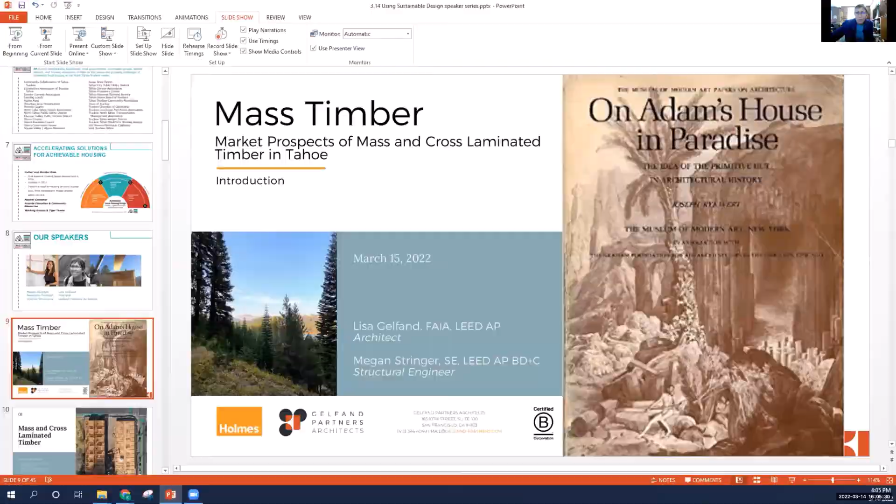Okay, I think I will just get going with the beginning part of this. This is Lisa Gelfand, and for 20 years I've had a place up in Serene Lakes. So that's my view of one of those lakes. For the whole of my career in architecture, it sort of started with this idea that the primitive hut and little houses are just the source of everything that every architect ever did. And certainly we feel like we're in paradise up there. So where it all comes together is how are we going to keep doing stuff so that we continue to feel like we're in paradise and that we haven't just destroyed the whole place.

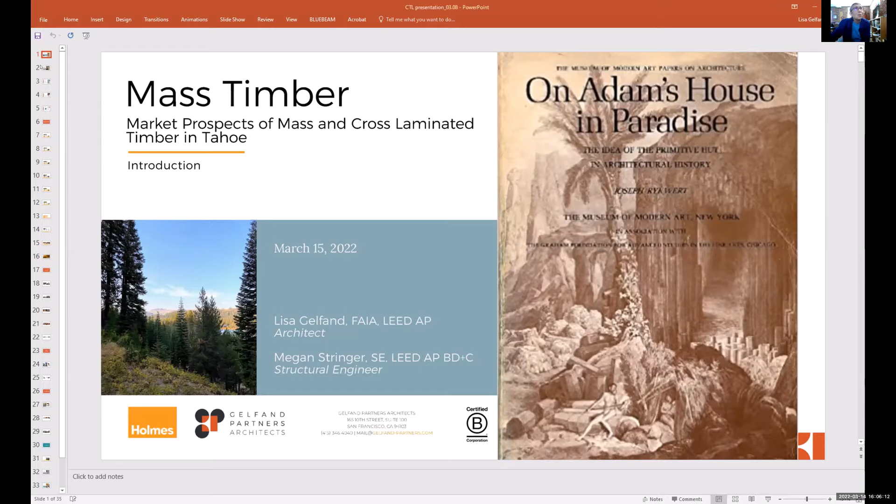And so one of the ideas is to think about how do we build with wood? Do we build with wood the way that we always did? Or is this something that we could change that would actually start to benefit both the building process, but also the forests? So I invited Megan to talk about it because she's actually been doing it. So Megan, do you want to talk a little bit about what your connection to this is?

Real quick. So yeah, Megan Stringer. I'm a structural engineer. I work down in the Bay Area in San Francisco at a company called Holmes, and we have offices up and down the West Coast. I started on my first mass timber project back in 2015. I worked on a two-story public library building out in the East Bay in Brentwood, California. Then I started working on a pretty large project. It was actually North America's largest mass timber building.

Back in 2015, and that took about 5 years to complete. So since then, I've been working on a bunch more, and our company overall is on over 50 mass timber projects, either completed, in design or in construction. So yeah, happy to share some of the things we've learned and show you all some specific applications that would be relevant to your community.

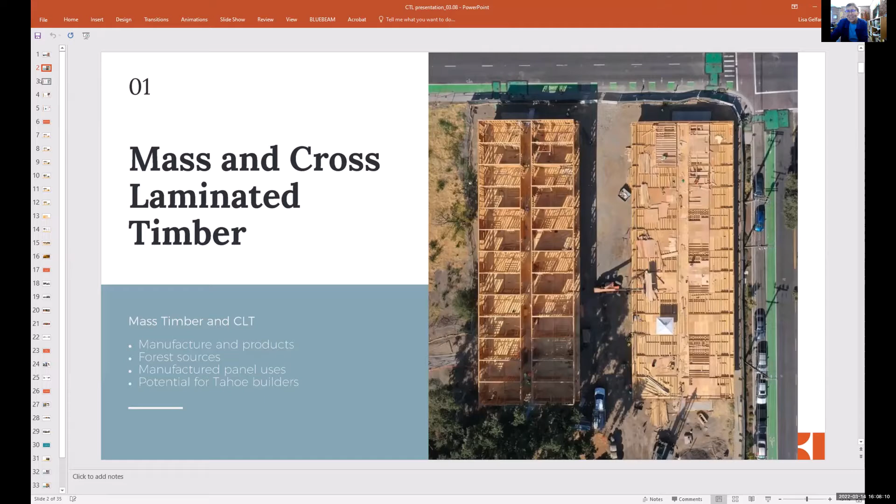there's a lot of different kinds of mass timber. CLT is maybe the one that people have heard about the most. It's basically dimensional timber laid up parallel and then perpendicular, so you've got the crossing at 90 degrees. That's what's up here in upper left. You could do it with nails. You could do it with glue. You could do tongue and groove. My cabin in Serene Lakes has got a tongue and groove roof deck. So this has been around. And DLT would just be laminated with a dowel. And mass plywood is just, if you kept laying up your plywood, perpendicular in different plies, you get another way of doing it.

One of the advantages of having mass timber is in fire. We've all had fireplaces. It's really hard. You can't just hold a match to a log and get it going. And so that's one of the really important things about this kind of wood construction as opposed to light frame, is that it really has fire resistance.

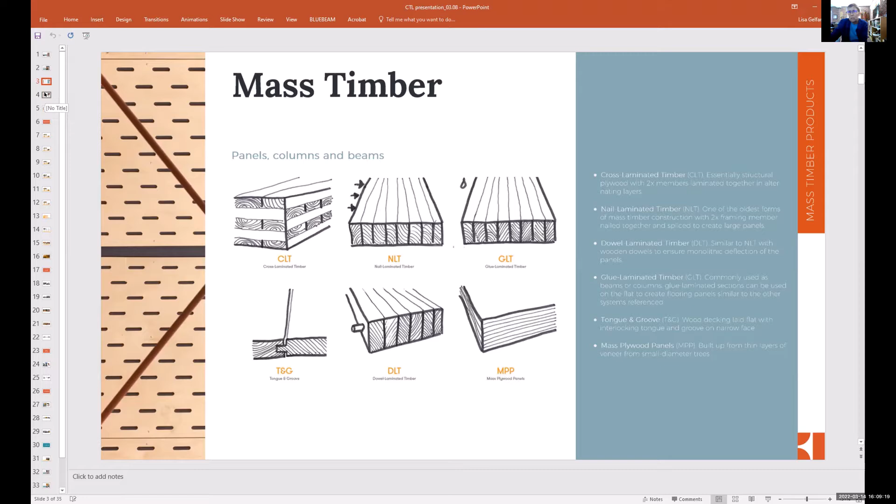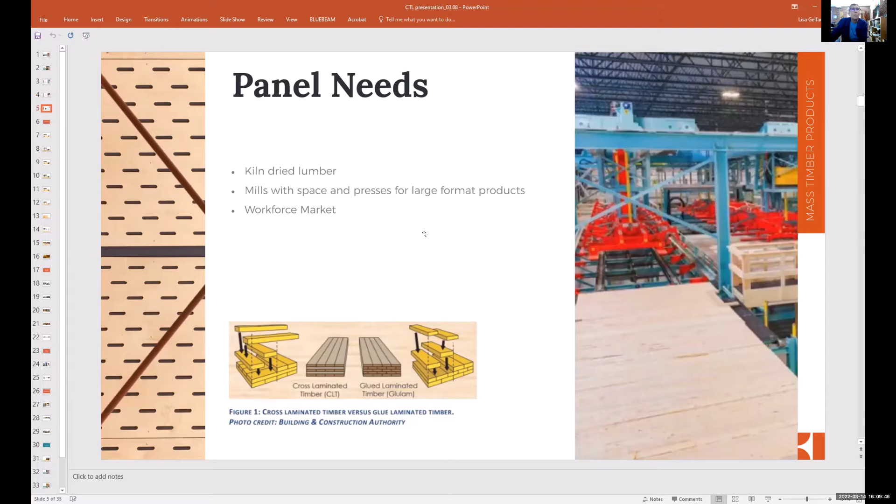So it takes really big facilities to make it. I was looking at the 100,000 square foot plant up in British Columbia. These presses are enormous, and the product that comes out of here could be 30 feet long or 40 feet long. All the different plants have different capabilities, but they all need kiln dried lumber.

And one of the advantages that we wanted to bring up to everybody is that, as opposed to dimensional lumber, where if I need a big rafter and I need it to be a 4x12, it needs to come out of a pretty big tree, the CLT or mass timber products are made out of small trees. And lumber companies say, well, they don't want to bother with small trees. And that's why they're pretty happy to be up there in British Columbia. But I found this study that was basically looking at how do you get an efficient process out of small diameter timber. So there's a ton of experts involved here.

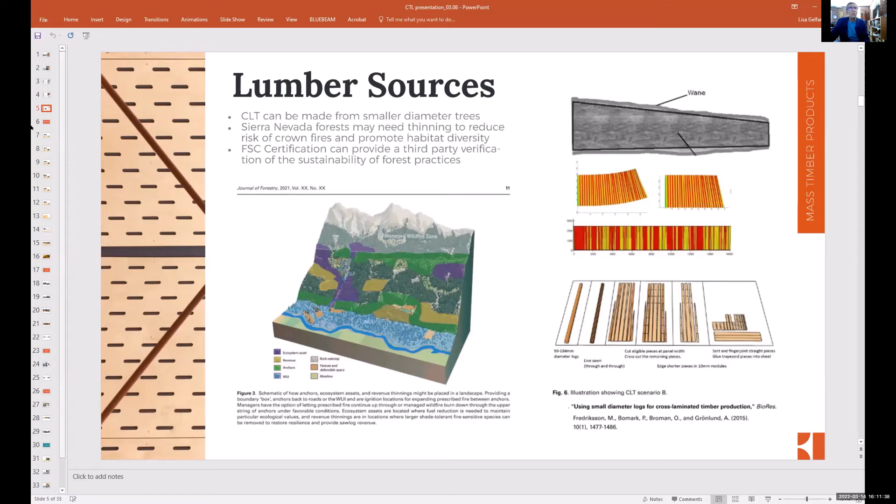And there really are ways to start answering some of those questions where somebody might say, well, you're not an expert, you don't understand. There are, and there's lots of attention from the Forest Service, from other people in industry as to how we could really do this in a way that promotes the health of forests, biodiversity, the safety of communities that are on the wildland-urban interface. These are all things that come together in looking at basically a new way to build things. So that's kind of the background for why this would be a great idea for us. And Megan's going to show us just how it works.

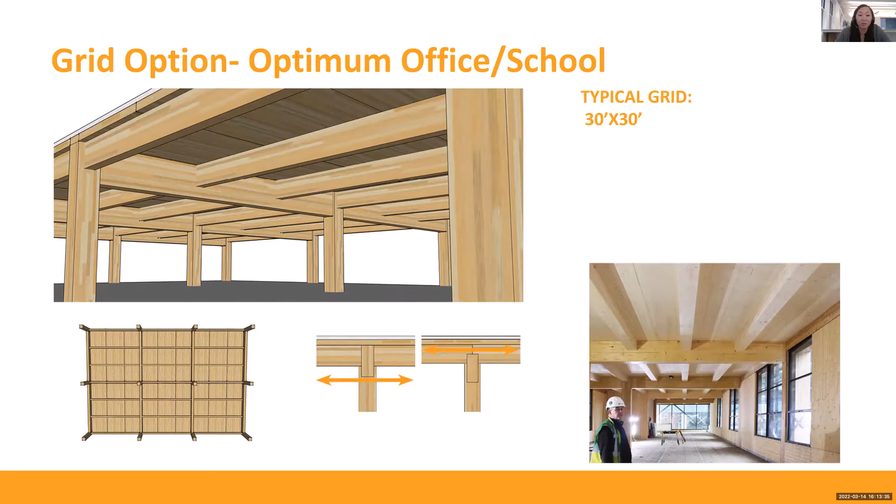You're going to have purlins in the one direction that the panels span to, and then you're going to pick up those purlins with girders. There's definitely also options to substitute out any of the wood glulam members for steel or even precast concrete. That picture there is showing a precast concrete example and how that looks.

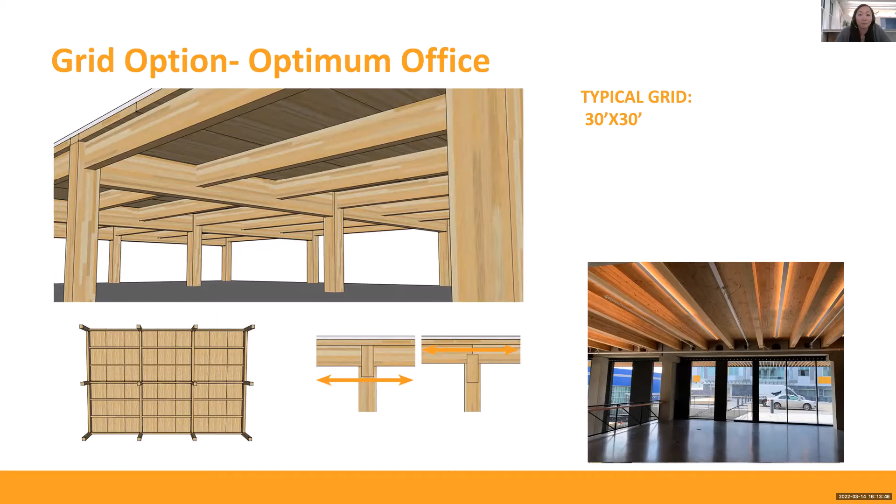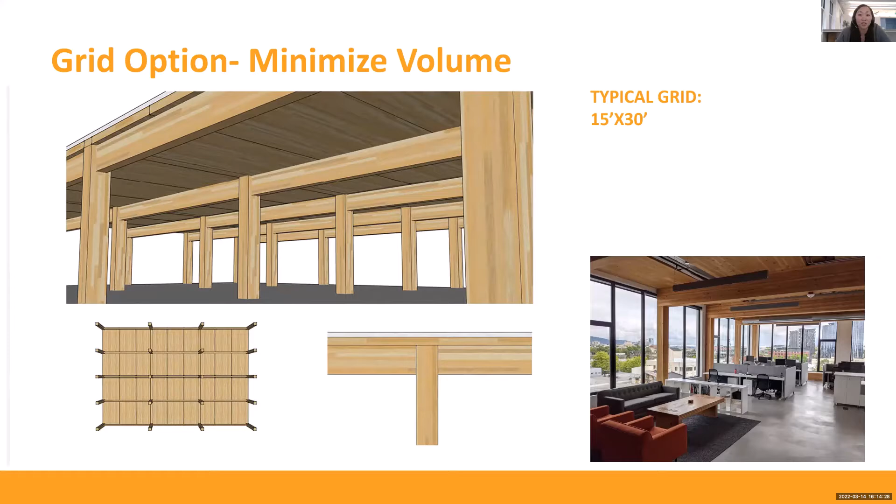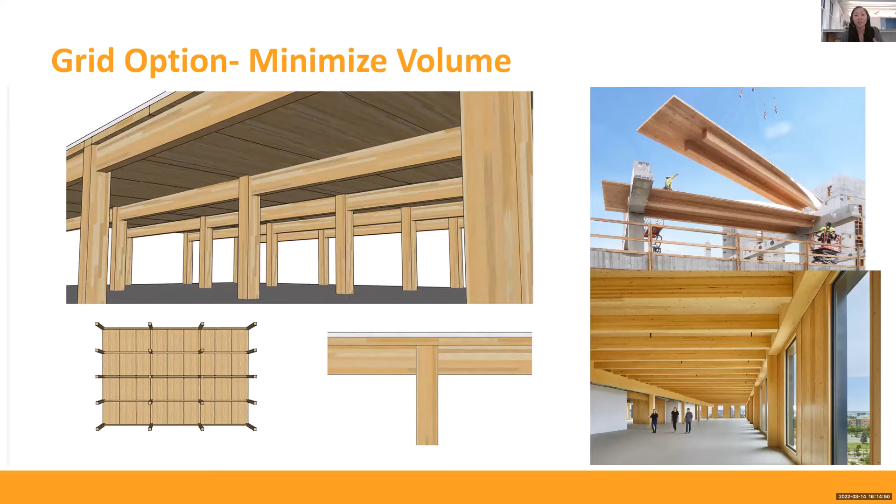Another option when we're talking about minimizing volume is what's called a rib deck. It's kind of like a precast concrete double T, in that it's a pre-manufactured wood double T. There's a couple pictures of that on the right. This allows for slightly longer spans and keeps the material volume pretty efficient. This other option is hinting at trying to push for even slightly bigger grids, and that's where you're implementing a steel or precast concrete alternate that can help you push out your spans a bit.

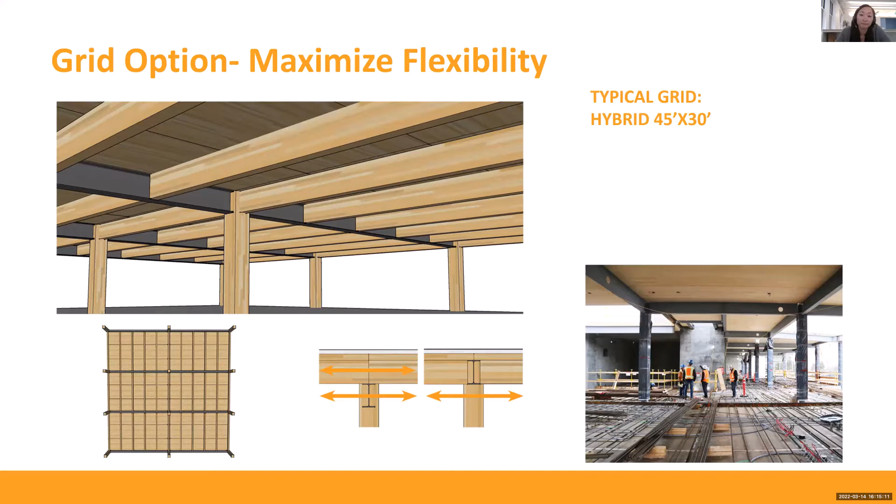Now note, if you're getting your panels from Europe, for example, a shipping container's typical width is 7'3", so you have to think about different grids based on which type of system you're using. This system works really well in multifamily residential, in that you typically have a lot of bearing walls or places where you can hide your columns within your walls. Note that this type of system hasn't been built very much yet. There's a lot in design currently, but there's really only one main built example, and that's the Brock Commons building up in BC.

Another hybrid take on a point-supported system is integrating a proprietary system called the Delta Beam system, that little steel element shaped like a trapezoid. It looks like it was taken from precast concrete construction, where you span this steel Delta Beam, and you do have to cast a concrete topping slab on top to get it all to work, but it does allow you to increase your spans a bit while still having a relatively flat soffit.

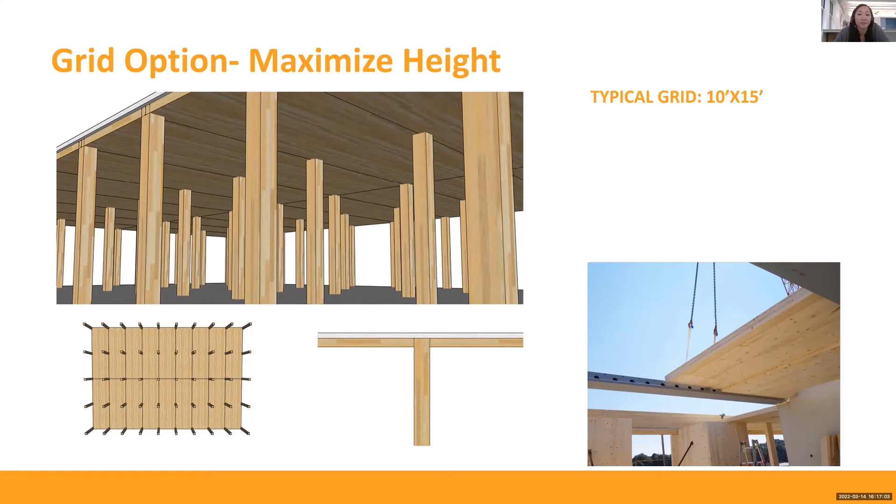And so again, as I was mentioning, your supplier will really matter. So this table is just showing kind of the main North American suppliers. I think most of them are located up in British Columbia, some are in Oregon or in Washington, but that's where the majority of our mass timber is coming from, down in California.

I think you just, again, want to realize that each manufacturer has different capabilities. And so you can see on this screen kind of their max panel dimensions. And whenever you're thinking mass timber, that manufacturer wants to produce the largest panel size that they can that fits in their big presses. So you got to think about that when you're, again, laying out your grids.

For example, the really big commercial project that I worked on that was the largest, we ended up on a 22-foot by 22-foot grid. And a lot of the manufacturers almost didn't bid on the project because they typically had a 40-foot long press. And by manufacturing our panels, like 18 feet of their press would be empty while they were manufacturing our panels.

So again, in hindsight, had we known that ahead of time, we probably would have chosen a different grid with the architect. But anyway, there are a lot of reasons why that came about, which we can get into at a different time. But again, just really trying to stress that each manufacturer has different sweet spots for their panels, and they have different CNC capabilities as well. So just something to pay attention to when you are choosing a manufacturer for your projects.

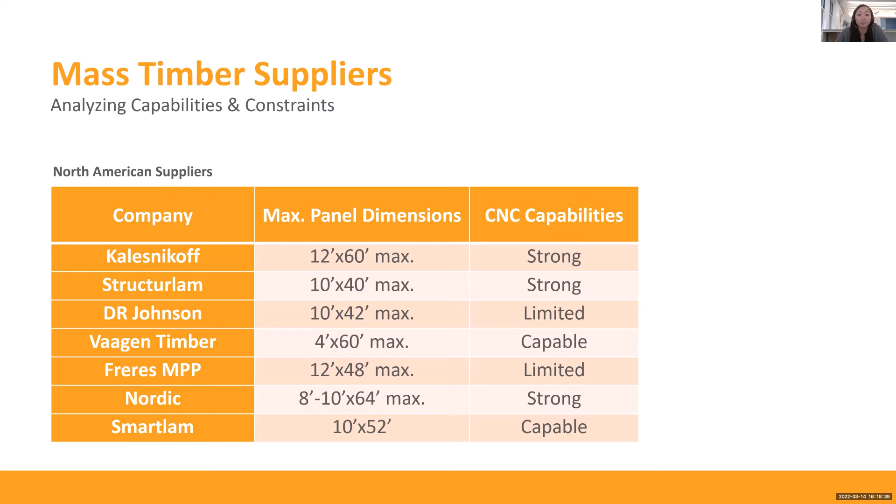I think the other bigger lesson learned that I've come across in my mass timber projects is that really the most successful projects are the ones that can integrate in the MEP. And I think that can't be overstressed. Typically, in the design process, this MEP integration with structure and architecture happens a little bit later in design, and with mass timber projects, it really needs to happen much earlier so that you can really integrate those systems together. And there's a lot of different ways to do that.

These are just showing a couple of the options of how you could integrate that in with your floor system here. And again, there's plenty others as well. But again, all of these strategies we're seeing in play now and getting designed.

And I think that also leads into a bit about this push in this industry to really, how do you pre-manufacture a lot of these larger pieces of a building that can come shipped onto site that already have the floor panels and the MEP and all of that integrated, and then get lifted on site and into place so that you're really reducing the amount of field time and construction time for building.

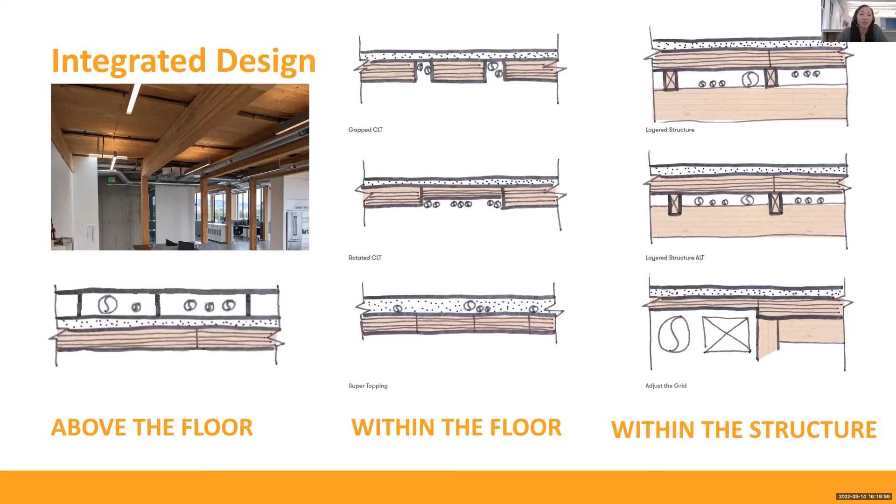So a couple examples of seeing some of this MEP integration are kind of shown here. So looking at the left, just that gapped CLT option where you're basically just spanning a plywood in that gap, and it does allow you to run small services. And then the picture on the right is showing where you're kind of layering your structure so that you can push down your girders so that you have a cavity over top that you can run small services.

And so looking at how that then relates into projects, we have a lot of low to mid-rise examples, and I'll just show you some here. So first up, we're going to be talking about a lot of structural systems where you have your typical plywood or cold form steel walls that are supporting your gravity loads, but also taking your lateral loads as well.

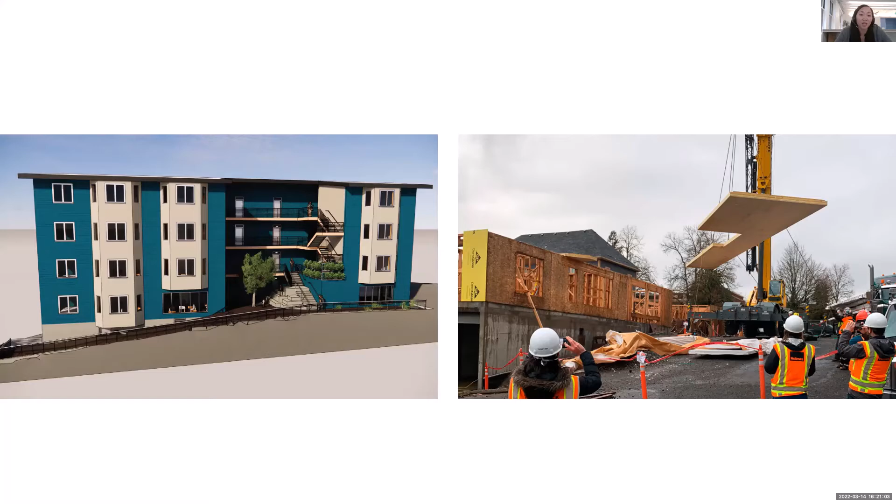This is a 16,000 square foot project in Portland that's going to be completed later this year, but you can see that first CLT panel getting lifted into place. Kind of again, another very similar project, a little bit bigger at 140,000 square feet, 6-story. Again, really sticking with conventional stick framing for all your walls, and then just swapping out those kind of TGI floors with mass timber.

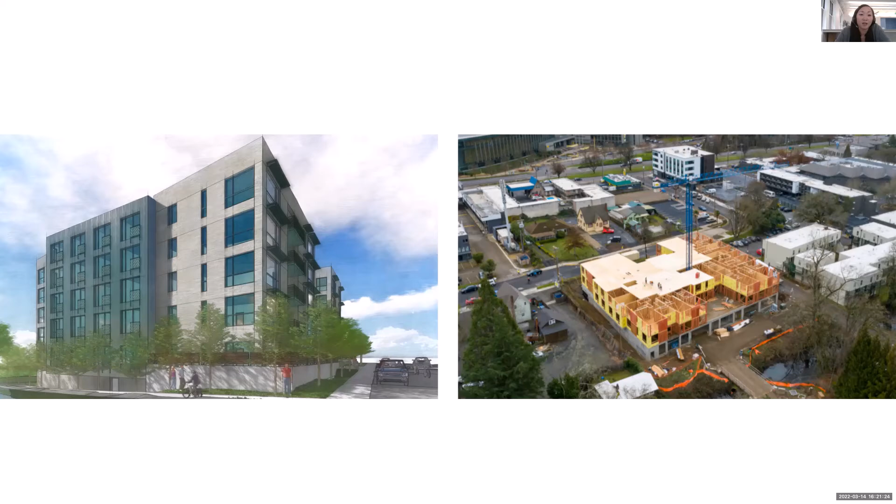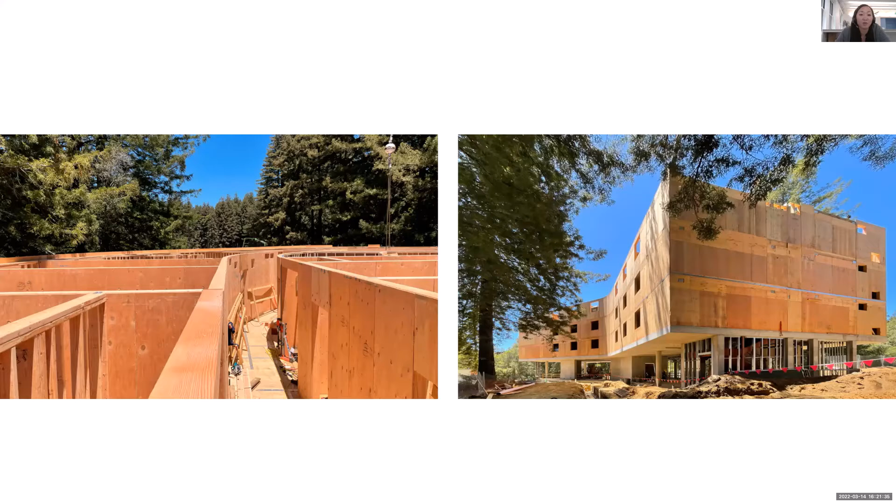Again, another example shown here. This is in Santa Cruz, California. A very similar construction type. A lot of these that we've just seen have been over a concrete podium. That's very common, and you can see what that CLT soffit looks like a bit on that picture on the right.

And so this multifamily housing is really a sweet spot for mass timber, in that a lot of times the floors are replicated as you go up the height of your building. And so again, thinking about mass timber as a pre-manufactured element, the more that they can replicate that same panel dimension over and over again, the more efficient your project's going to be.

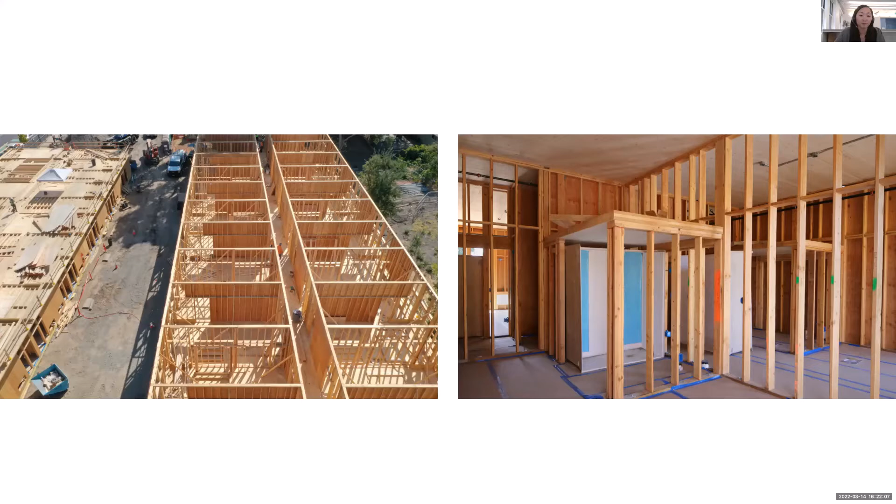So a slightly different take on a multifamily approach, and this is an affordable housing project in Santa Cruz that's in design right now. We actually started this project as cold-formed steel bearing walls with CLT panel floors. And once we got that priced, the steel was coming in pretty high. So we actually switched this whole system to a point supported system. So basically we just have columns and the CLT panels sitting on top of them. So we have a pretty tight grid, but again, it works pretty well with the unit layouts.

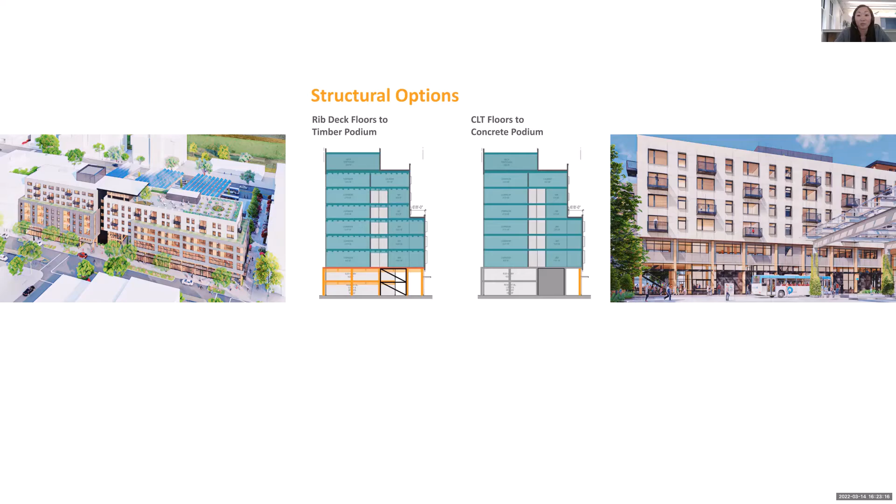This is a type 4B project, so it does need a 2-hour fire rating. And we are allowed to expose 20% of the ceiling area in this project. Note that some future code provisions that are coming allow in a type 4B construction a full 100% ceiling exposure in these types of projects. So something that we may try and push with the permitting jurisdiction for this project once we go in for permit, but we'll see how that works.

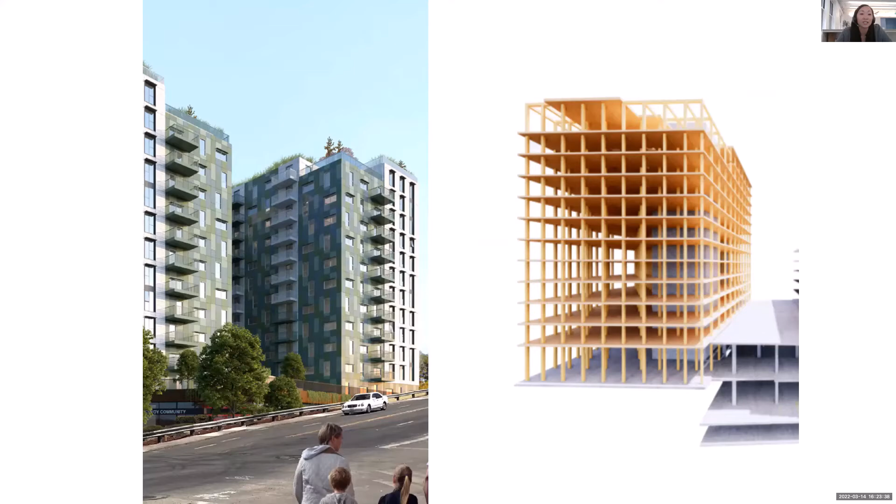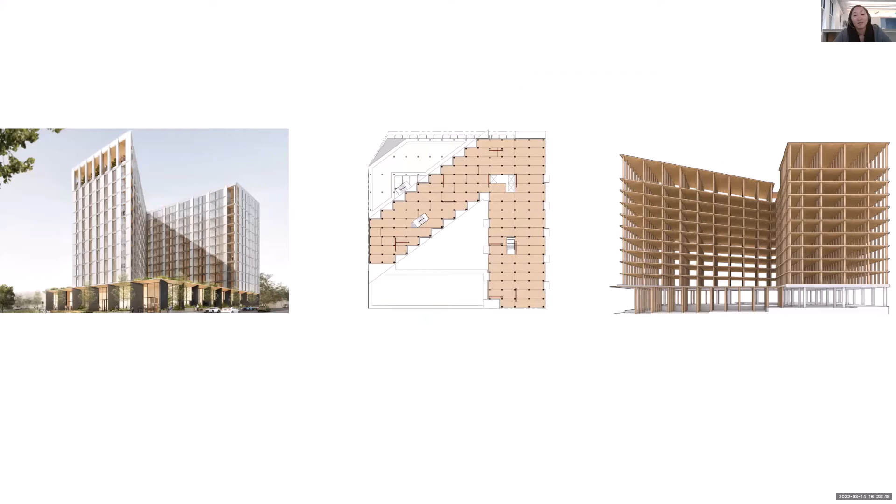And then some high-rise examples. So again, a little bit more of the same. Both of these projects are actually the same structural system, that point supported or post and plank system, getting up to 12 stories here, and almost 300,000 square feet of affordable housing in San Jose. And then probably the last example of this is just another example. This project's actually up in Portland. Again, another point supported system that we're seeing for multifamily housing.

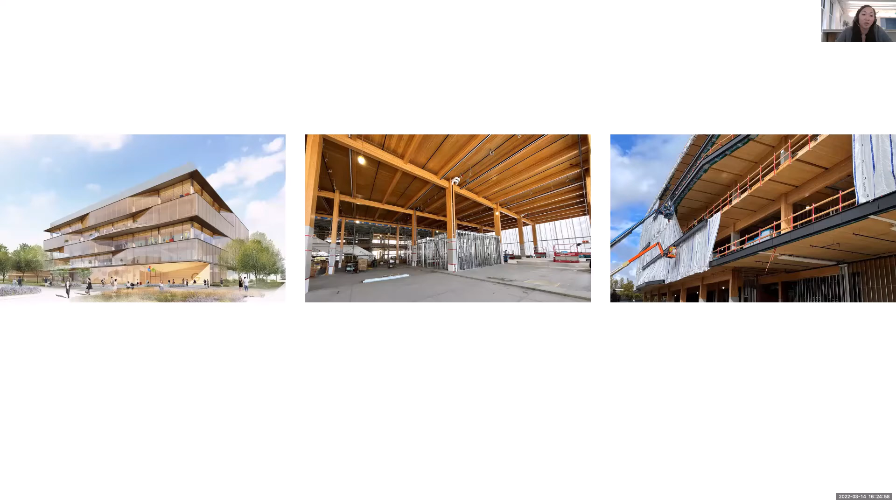This was for another commercial application where we utilized mass timber, again, just showing some really pretty exposed timber. This is showing a layered approach where the girders are pushed down from the purlins, and then you have your panel spanning between purlins. Another project down in San Bruno that has a very curvy undulating roof, but does utilize glulam beams and purlins, and then CLT spanning to them.

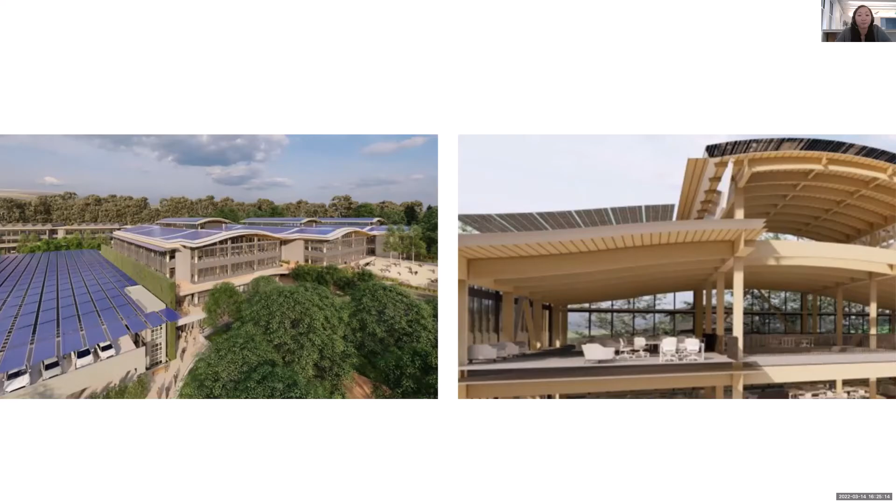And then this is my last slide. I just thought I would leave you guys with a couple of things to think about, and be happy to talk more in the Q&A. But in these mass timber projects, you really need to look at your project team and selecting the right team to make it a successful project. I think we've had plenty of projects start, and if they don't have the right team on board, whether that's a contractor that's knowledgeable in mass timber, or an owner or an architect that's willing to understand the differences of a mass timber project over a conventional concrete or steel project, that is really just going to be key to keeping your project mass timber throughout the whole process.

I think another key thing that we didn't really talk about is fire integration and how that plays. Mass timber and fire is a really close relationship. And so you need to have a good fire engineer on board to help you in your designs. I think procurement is another thing that we can talk more about, and just volume of timber for your project, how you go about getting onto the schedule of some of these manufacturers. That's really what you're doing, you're buying a slot in their production schedule, and you really need to hit that slot. And again, just understanding where your timber is coming from, I think, is also key.

I think construction tolerance is also something important to talk about in projects where you have multiple structural materials, whether that's concrete and steel integrating in with your wood. Each material has a different tolerance, and so taking that into account in your detailing is going to be helpful.

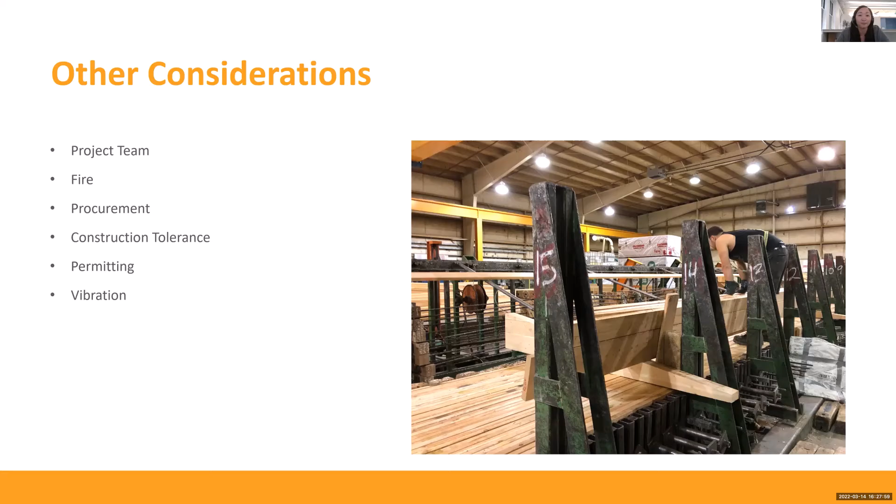Yeah, well, just to bring it home to Tahoe and to Truckee, these mid-rise buildings, the multifamily housing, which is such an important piece of what needs to happen in Truckee and the Tahoe Basin. And then I put prefab kits here. They've started, there are some that have started for schools, and I look at my cabin, which I almost finished remodeling, and it was a kit, and there's a lot of kit houses around the basin. So those are all ways that it applies directly to Tahoe.

And I think if we could tie it to the work that needs to be done in the forest, and that can help us restore the health of the forests and put those trees to good use, that makes it a very circular sort of enterprise and what we've all been looking for. So it's pretty exciting.

And in terms of schools, we do a lot of schools, my office does, and I'd like to do a school, and regulatory acceptance is a huge deal on that. I see that there are two big bonds for the school districts, both in Tahoe and Truckee. And if there was any consideration of using it in those school buildings, the Division of the State Architect, DSA, would have to be on board.